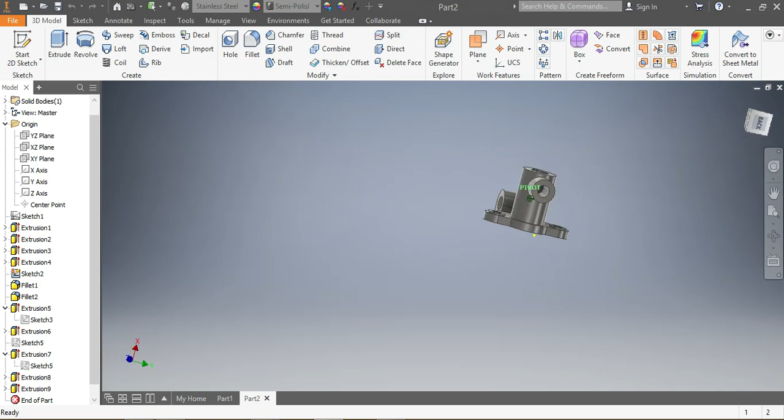Hi, let's draw this drawing that you see in front of you. We've done this one in the past, but today we're going to use a new approach, an easier one. So we're going to start there.

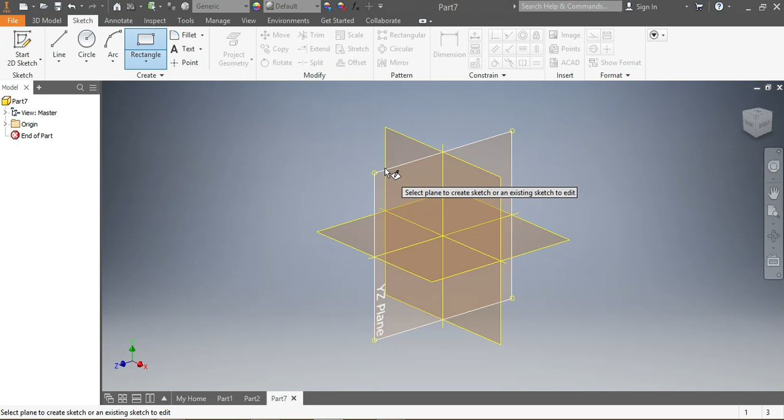We're going to go new, metric, standard millimeter, and create. Once we're here, we'll go on sketch, then use a rectangle. I think it's going to go faster. Then we choose our drawing plane, which is going to be ZY. Once we have our drawing plane, we're going to start with our rectangle.

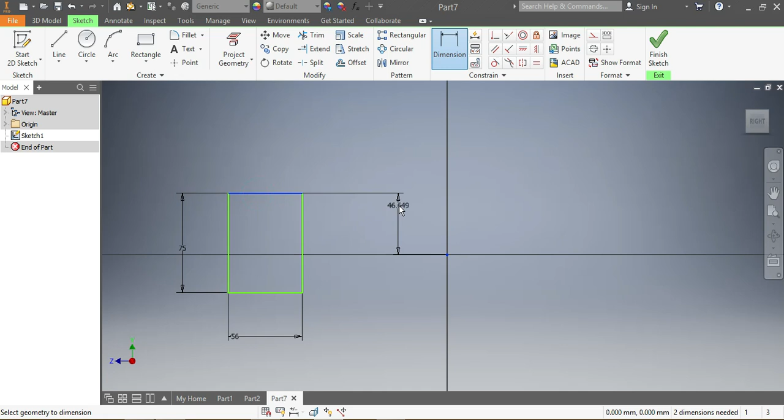We need to make sure this one here is 56, and this one needs to be 75. Now I need to make sure that from the top, that needs to be half of 75, which is 37.5.

Once those are in place, I'm going to pull my rectangle a bit on this side, because I need some space there for something we'll discover in this drawing. Next I need to draw this line here to help with some guidance. Then I want to make sure this line is parallel to that one. It will be parallel — it is parallel now.

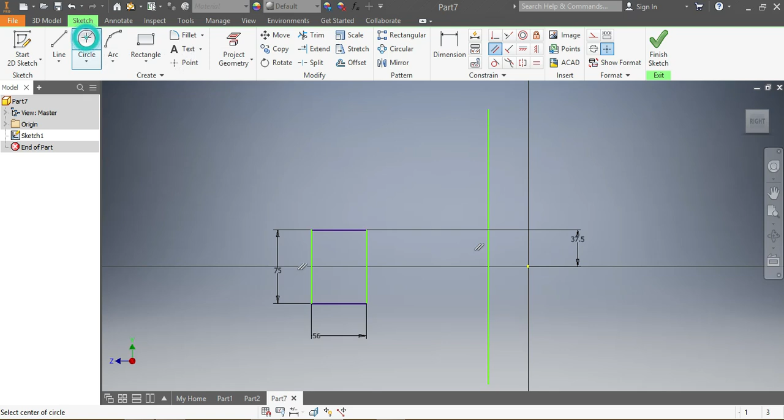So then I'm going to draw those circles. That's my first circle. Then comes my second, comes my third. Here again, almost there — first, second, and third. I come here again — first, second, and third. So then what I need to make sure about is this dimension.

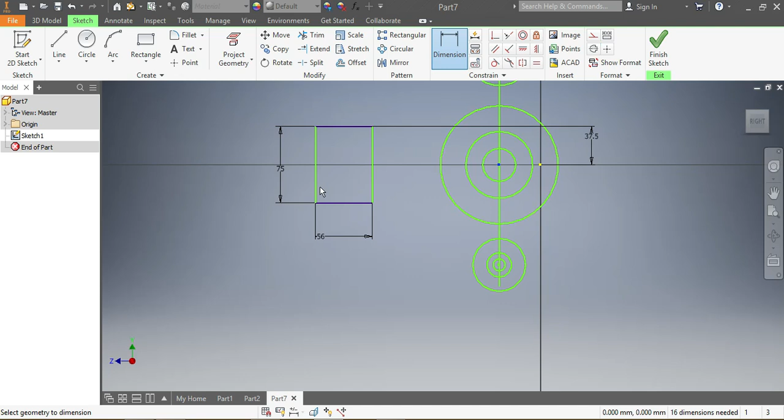From the top, that one needs to be 128. So I need that to be 128. And again from the top, I need that one to be 130. I got it right.

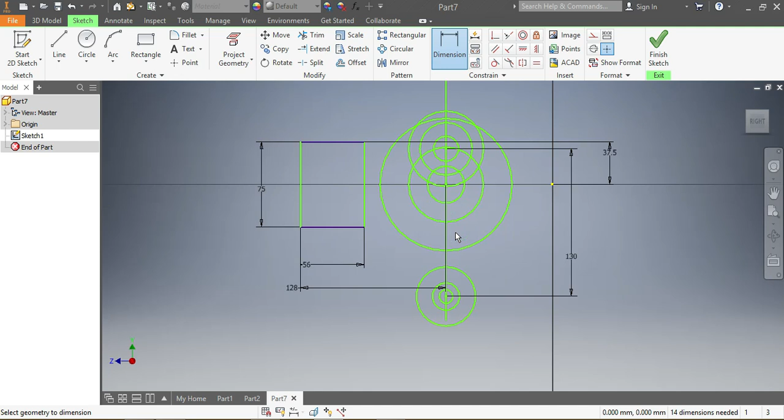Don't worry about the way it looks there, we're going to get it fine now. Then I need that one from the top to here to be half of 130, which is 65. That's good now, so I need to give dimension.

This one here needs to be 48, and then the second one needs to be 36. The third one needs to be 18, so that needs to be 18. Come on, so that needs to be 18. Great, and this one here needs to be...

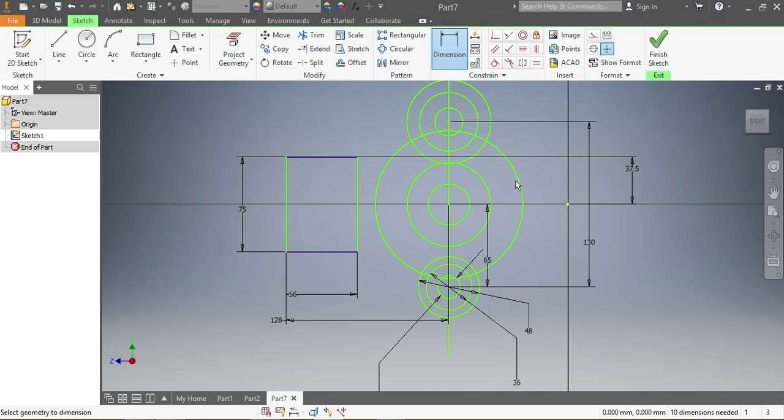90. That one needs to be 70. Okay, 70. The following one now needs to be 36. So, 36. Great, so what am I going to do now?

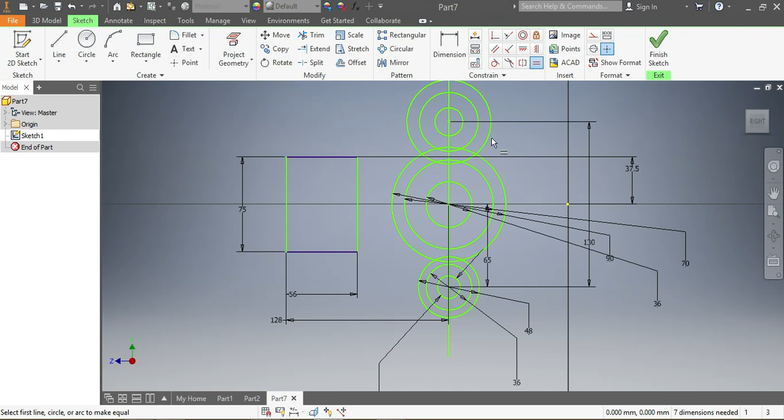I need to make sure that this one here needs to be equal to that big one. That small one needs to be equal to that one. I can't see properly which one is which, but I'm going to try my chance — it's going to tell me anyway. I want this one to be equal to that one. I got it right, so that one needs to be equal to that one.

Once I have those in place, I'm going to go for this line — there's my first line. Then I'm going to go for my second and my third line, in different places.

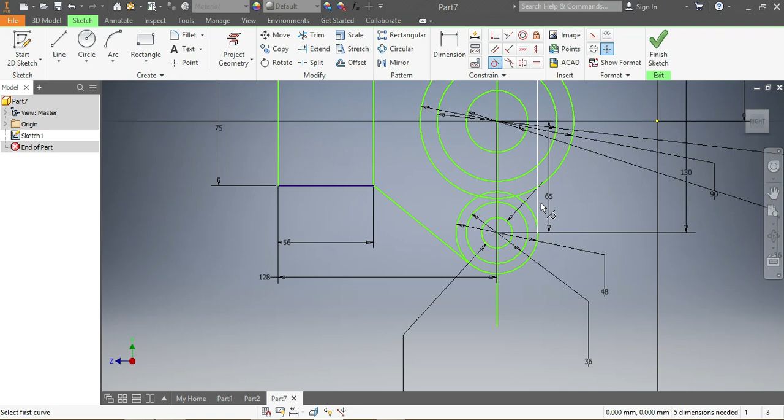Now I need to make sure that this line here is tangent to that circle. We're saying it is tangent, which is great. So this one here needs to be tangent to this circle — I hope it is tangent as well. That is tangent already. And that line needs to be tangent to that circle. It is.

Now this one needs to be tangent to that circle.

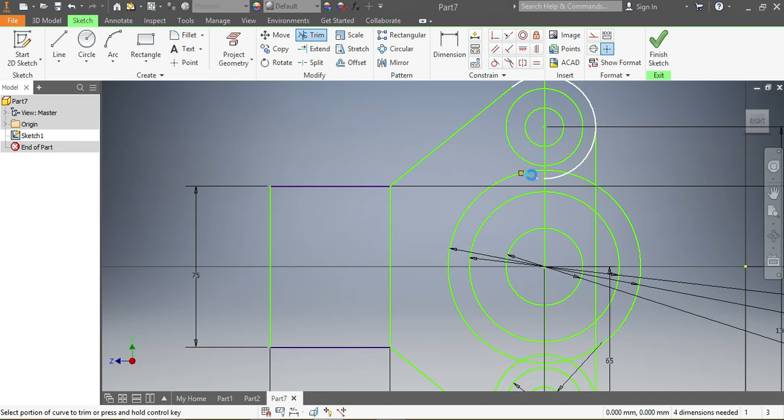Okay, cool. So now that I have everything in place, what I'm gonna do is trim everything that I don't need. So I'm gonna go and trim there. I don't need that spot there, so I'm gonna trim that spot. I'm gonna trim this spot, that spot, and that spot as well.

Okay, so I come here again. I trim that spot, I trim this spot, I trim this spot, I trim that spot. I don't need it. Okay. Here again, I trim this spot, that spot, the spot because I don't need it. I trim that one, I trim that, I trim that.

Alright, so once that is in place, what I'm gonna do is I don't need this line anymore. This line was for guidance, so I'm gonna have to delete it. Keyboard delete. So now I'm gonna go and 3D model.

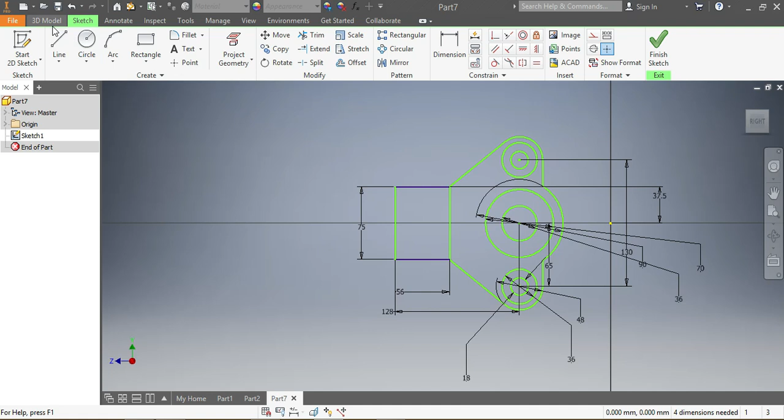I need to give some dimensions to my drawing, so I'm gonna punch extrude. Okay, come on, man, don't be that crazy. So then I'm gonna go there and choose that one. That one needs to be 16, right? So, 16. Okay, 16. So I say okay.

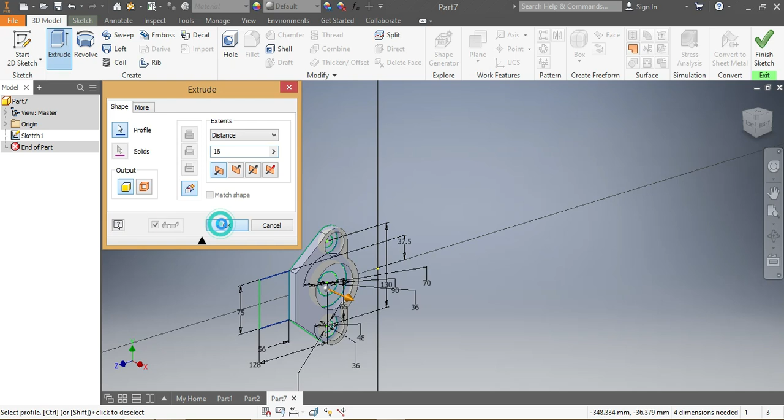Then I'm gonna come here. I need to see my drawing, so I need to see my sketch. So I go on visibility, I punch visibility. I go on 3D model again, I punch extrude.

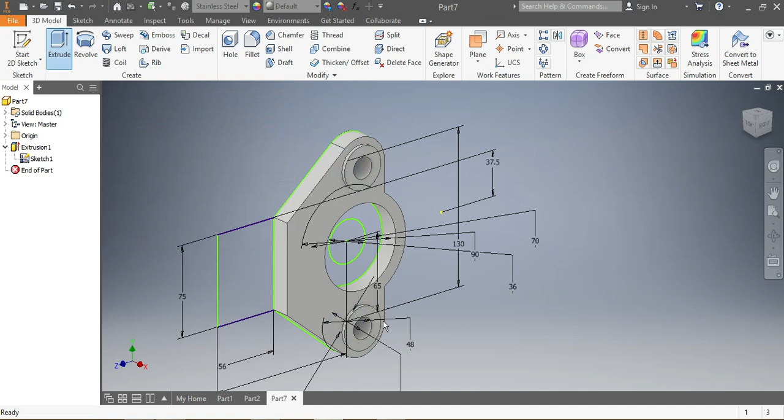So I come here, I choose that one, I choose that one as well. Both of them need to go up by 19. Okay, can you see there? Where is it? Can you see that one there? Can you see here? So that needs to be 19. So I come back here, I say 19, 19, okay, I say okay. So I need to have this kind of a tower there.

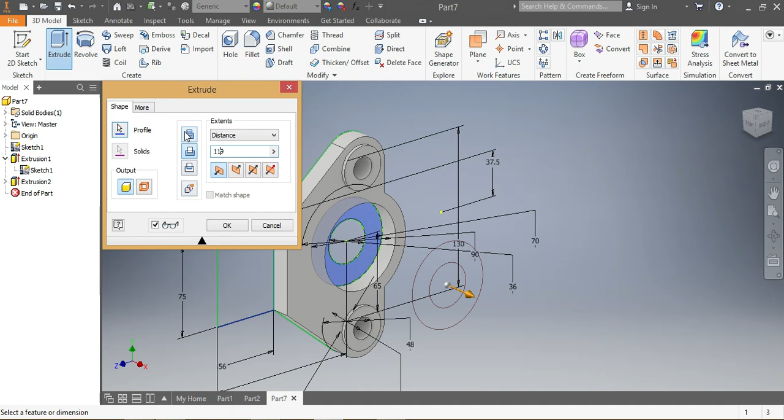Okay, so that one needs to go up by... come on, sorry, I punched wrong there. So extrude again. So that one needs to go up by 119. So 119, 119, that's what I need to go up by, 119. There you can see it.

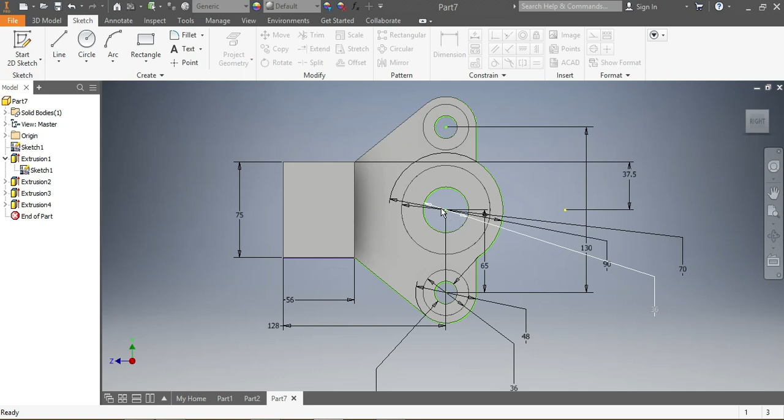So I say okay. Again, I need this spot here to go up by what? 56. So 56, 56, okay. So now check out how your drawing looks like. So another thing that you need to do, you just need to make sure about the dimension from there to there. But anyway, you could have done it before, but we're gonna see how we're gonna deal with that one.

So now I'm gonna have to draw something that is missing so far. So since something's missing there, I'm gonna put a fillet here. So I come here, I choose that one. I want a fillet of what? It needs to be 28, so 28 millimeters. So 28 millimeter, I say okay. That side as well, 28 millimeter. Yes, I go apply. Okay, so I go apply.

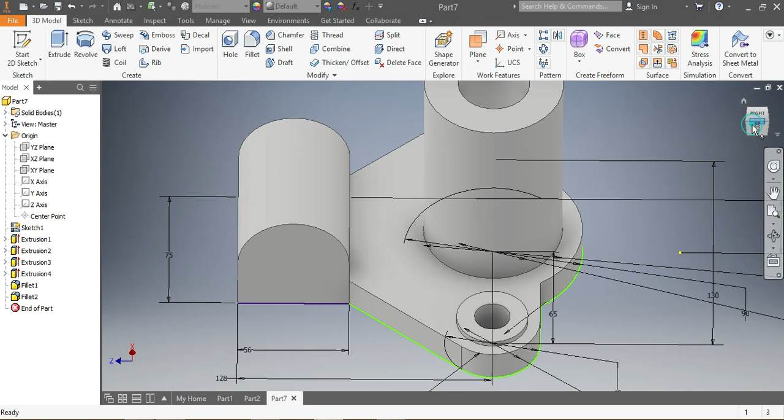So now there's something that I need that is missing there. So then I'm gonna have to choose my drawing plane. So I'm gonna go for, where is it? I say new drawing. Here I'm gonna go for my rectangle. So my rectangle needs to start, let's say, from there. Okay, from there and then up to there. Alright, up to there.

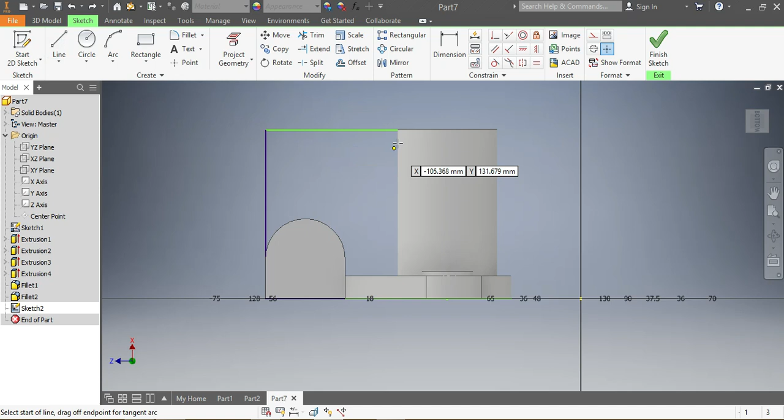So then what I'm gonna do is I'm gonna draw this line here. So this line needs to start from there, okay, from there up to, let's say, up to there. And I want now this line here to be tangent to that. So it is tangent now.

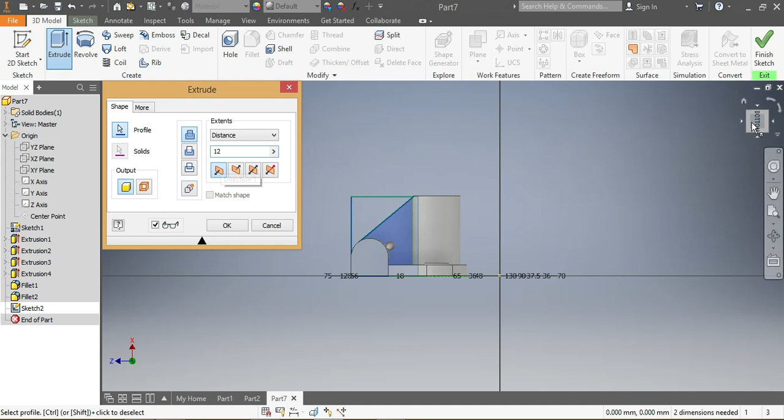So then I'm gonna go for 3D model. I say extrude. Then I come to the spot here, I choose that spot. I want it to go by 12 millimeters. So 12 millimeter, let's see. Okay, 12 millimeter both sides of the plane. So that is great. Then I say okay.

Alright, so there is my drawing, and another thing that I need now, I need to make a new sketch here.

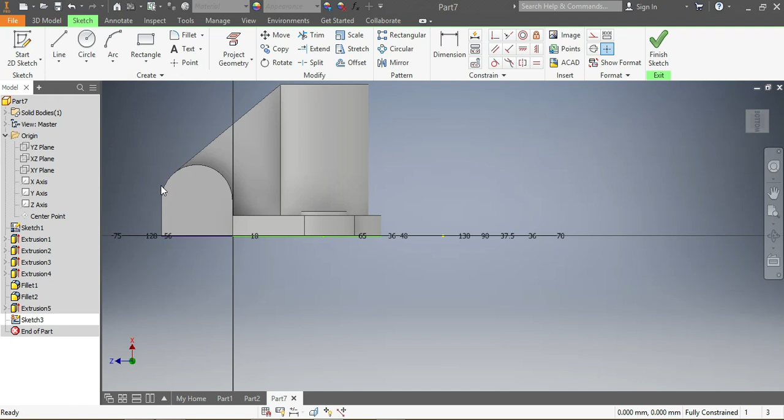That new sketch is for that hole that you see there. So let me bring it closer. I go with a circle, and the circle needs to be there. I need to make sure the border size is set, so this one here needs to be...

28, sorry, that needs to be 28 millimeter. And from there up to there, that needs to be 28 as well. And from there up to there, that needs to be 28 as well. So that is 28, great.

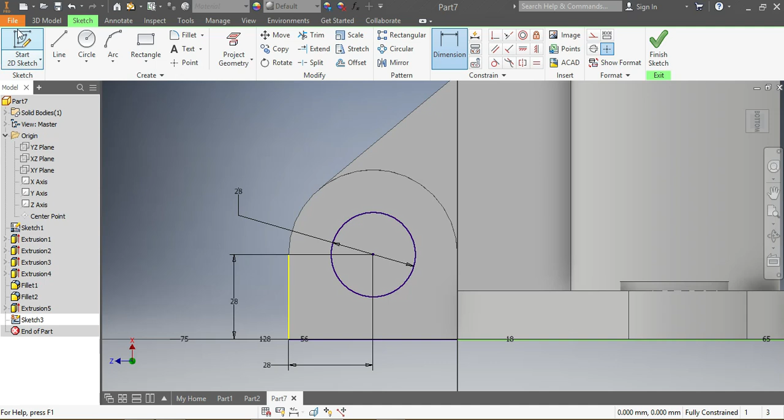So I go 3D model, extrude, I click on my circle, okay. Then let's say that I want it to go both sides, right? So that is bigger, let's make it put 100. You see, 100 both sides. 100 is too small. 900, great, both sides. Then I say cut. You can see that for cutting, yeah, okay, so there is my hole there.

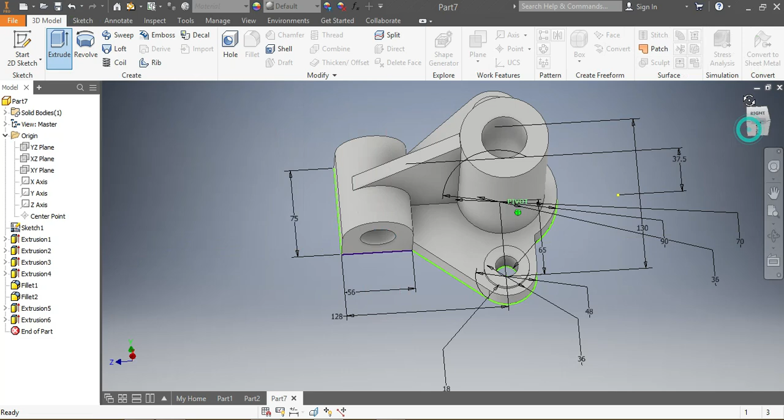You can see there is a hole there, my sample. So again I'm gonna come this side here, and choose my drawing plane. So what drawing plane stands there? Let's see, it's XZ, right? No, it's not XZ. No, so it's YZ. So I go there, I say new sketch YZ, exactly.

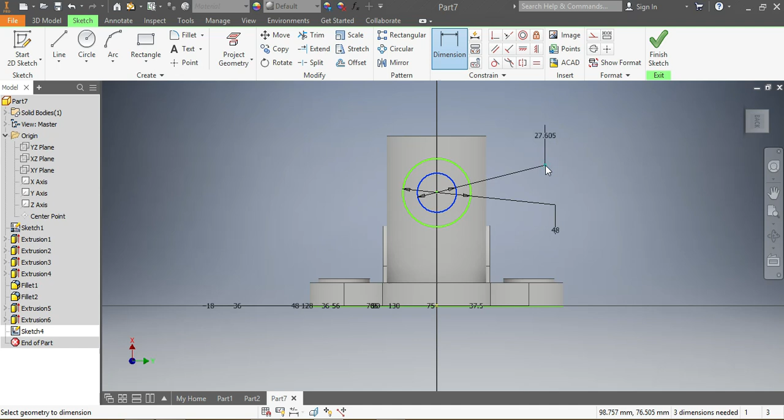Then here comes my two circles. So my first one, my second one, and as per the drawing, this one here needs to be 48. So one needs to be 48, okay, and the other one needs to be 25. That one is 25, and that circle there, I mean that center, needs to be 89 millimeter away from the bottom. Then I say okay.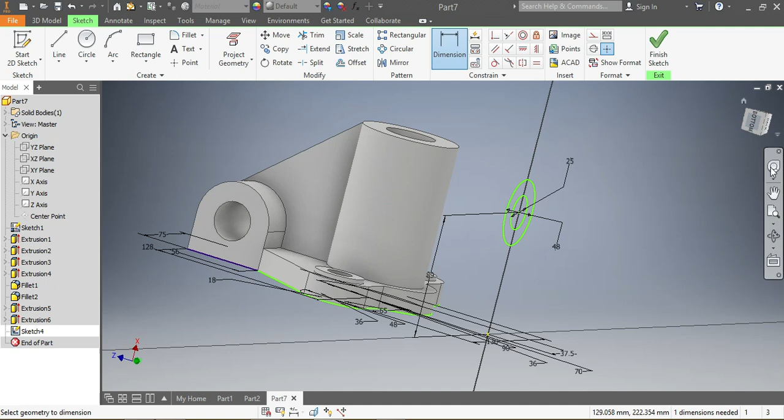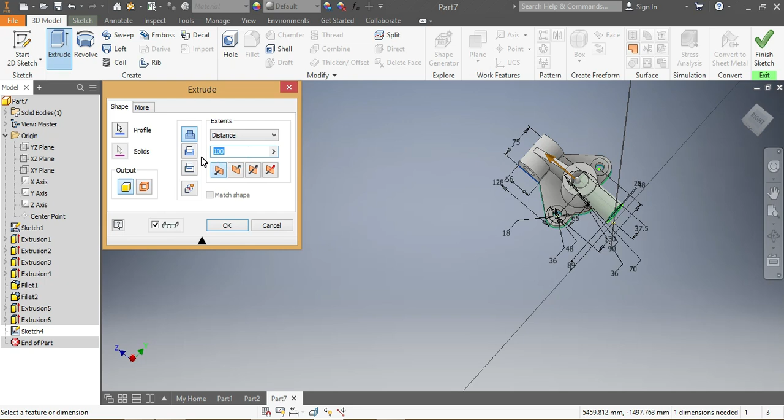So once that one is placed, what you're gonna do now is go into the model, go extrude. So you want this one here to go inside there. Not like that though, but let's put 100. You see 100? Okay, how's 100 doing? That is too much. We should have measured that from the beginning, but it's not a big deal.

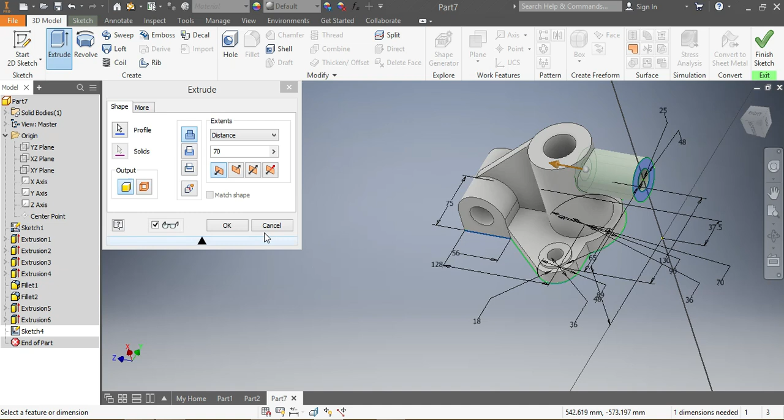So let's see what we have inside there now. We're gonna put 70. So 70 is inside there, okay, yeah, 70. And then we say okay, but we want it to be shorter. This one is shorter.

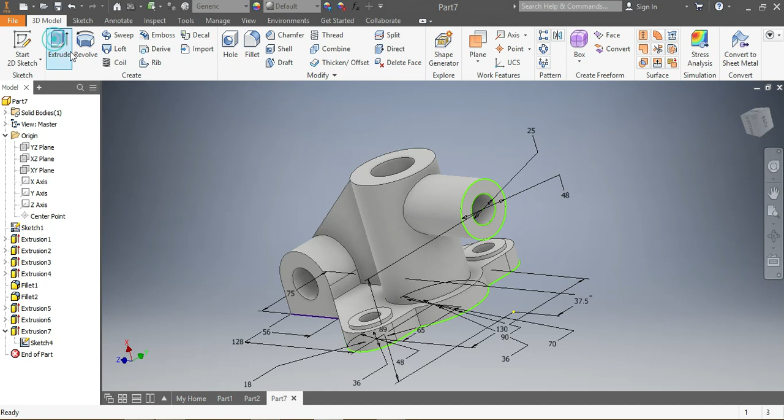So now look at what we're gonna do. We go on 3D model again, extrude, we come here. First we need to put the visibility on, so don't worry about that. So visibility on, extrude now. We come here, we're gonna cut that part by 20 millimeter. How's 20 looking? Looking good? No, 25 millimeter. That looks great. Then we say okay, and 3D model again.

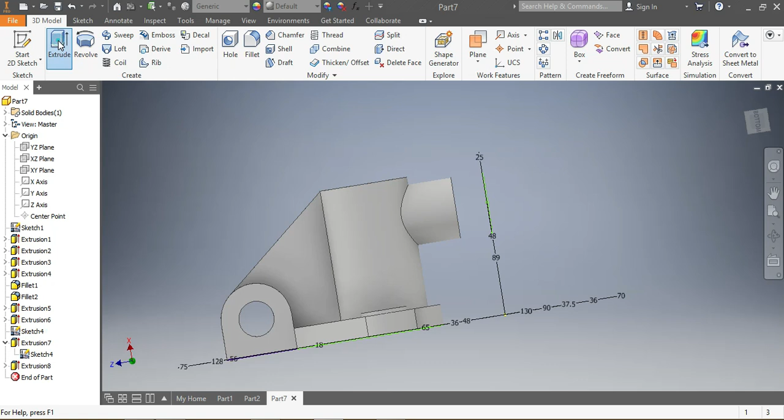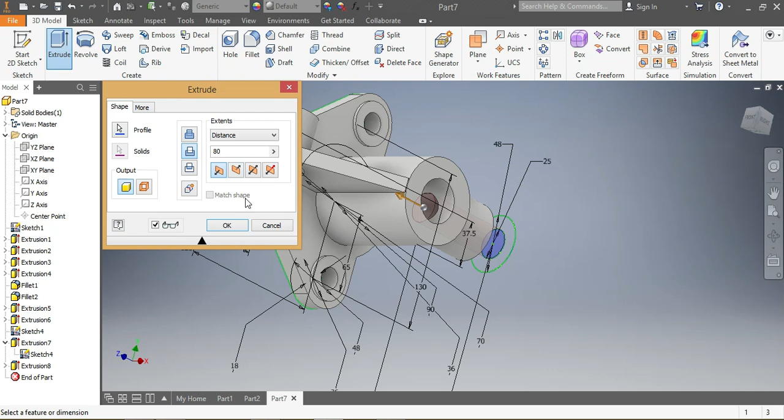That circle needs to go through. So we go there, we're cutting, let's say 80. So 80 this other way, exactly. Okay, so then now you finish your drawing, everything is fine. You can even put it 88, does not matter.

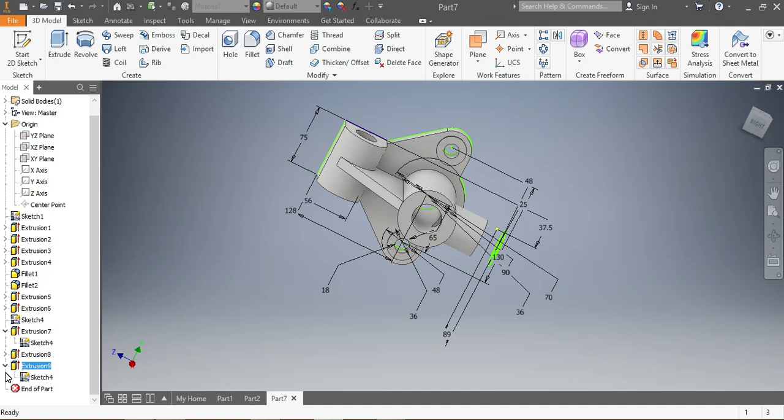You go okay. So now what you're gonna do is remove the visibility. Come here, use the visibility off. First sketch again, visibility off. So here's how your drawing looks like. You can see everything looks just okay.

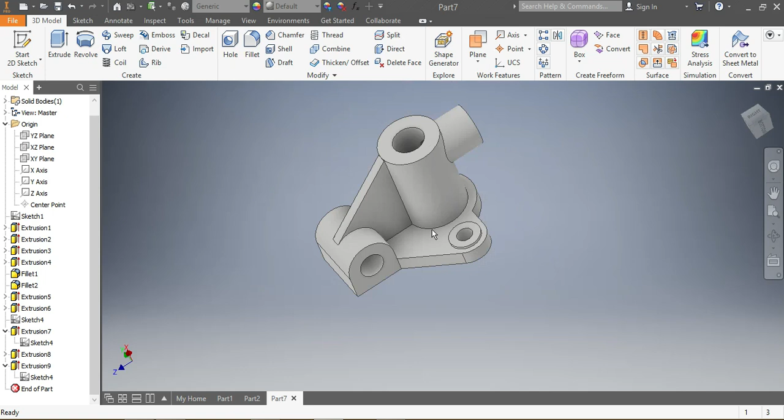So now if you want to choose the material, what you're gonna do is come here, generic, let's go for stainless steel. Okay, stainless steel looks shiny.